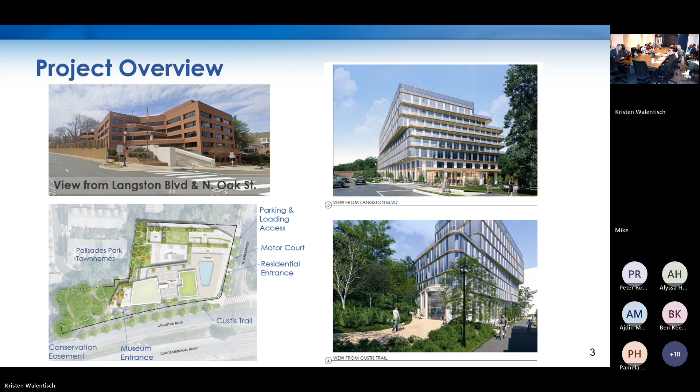As a refresher for this project, in the upper left-hand corner we have a view from Langston Boulevard and North Oak Street of the existing office building that was built in the 1980s. In the lower left-hand image, you can see a site design of the proposed building with some points to call out. In the upper right-hand image, a rendering of the proposed building from Langston Boulevard and North Oak. In the lower right-hand image, a rendering of the museum proposed on the ground floor from the southwest corner of the building. Okay, turning it over to Daniel.

Thanks, Kristen. I'm Daniel Creed with the Department of Environmental Services. I'm covering the transportation aspects of this application. The site is located at the corner of Langston Boulevard and North Oak Street, and the property is served by multimodal transportation options, including a nearby ART bus stop located just east of the site along Langston Boulevard. Additionally, the Rosslyn Metro Rail Station and associated bus bays are approximately a third of a mile southeast of the site. The site is subject to the transportation policy found in the Master Transportation Plan, or MTP, and the Langston Boulevard Area Plan.

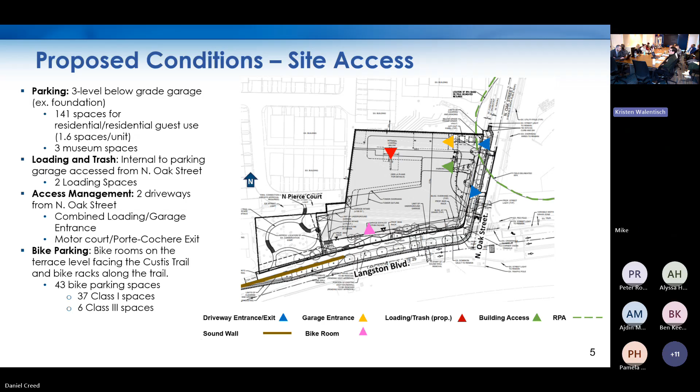The existing sound walls serve Interstate 66. Any modifications to the sound wall will require approval from the Federal Highway Administration.

The applicant is proposing a 43-foot wide streetscape consisting of a 13-foot landscape buffer, a widened 12-foot wide Custis Trail, and an 18-foot wide building zone and landscape buffer.

The Langston Boulevard area plan does not provide specific streetscape sections, but does provide recommendations on how a proposed residential building should interface with the Custis Trail. If the sound wall is removed, the plan recommends street trees between the road and the trail, a 20-foot landscape buffer between the trail and the building, and an overall building setback from Langston Boulevard of 45 feet.

The Langston Boulevard area plan also designates the intersection of Langston Boulevard and North Oak Street as a potential location for future intersection study. The plan identifies several intersections where there are opportunities to achieve Vision Zero goals and improve intersection operations. The Custis Trail crosses North Oak Street at this intersection, and the plan recommends that the intersection study evaluate opportunities to create more comfortable pedestrian crossing and manage trail interactions. The applicant has submitted a study.

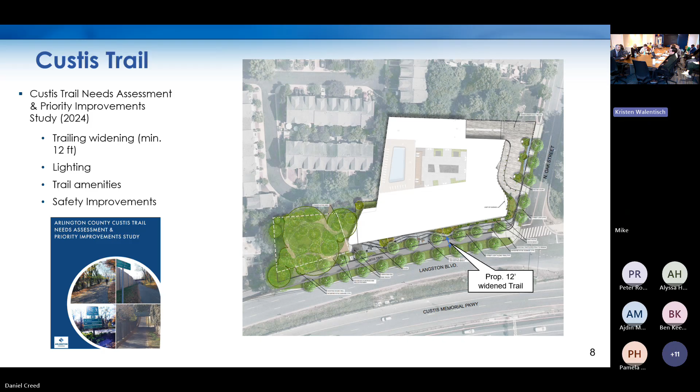To protect water quality in sensitive areas along Arlington streams, certain areas have been designated as resource protection areas. A resource protection area is an area designated by the Chesapeake Bay Preservation Ordinance that typically includes a 100-foot buffer around protected wetlands, streams, and tidal shores.

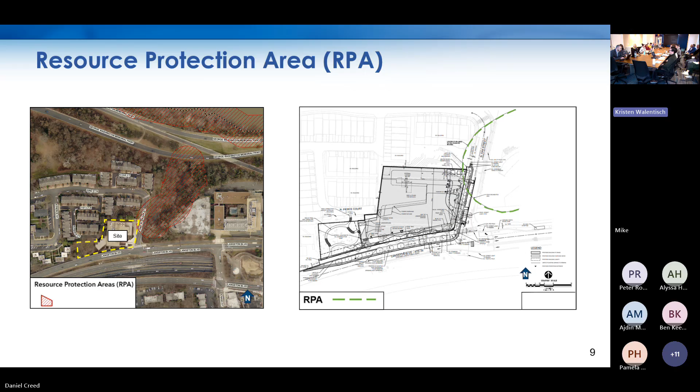As currently designed, a small portion of the proposed building in the northeast corner is within the RPA and will require an RPA exception. RPA exceptions are reviewed by the Chesapeake Bay Ordinance Review Committee, or CBORC, and require a public hearing. The project must be approved by the CBORC, or any required mitigation included, prior to the county board hearing.

Turning to open space and landscaping, there is the conservation easement located on the southwest portion of the site. The easement is held by the Northern Virginia Conservation Trust. There is not much area plan guidance for treatment of the conservation easement. The area plan just notes its existence and states that the existing easement trees within it should be conserved, which is what is proposed. So it will remain largely untouched except for removal of invasive species and the inclusion of a new pathway. I believe the applicant has a revised design, which we'll see tonight on their slides.

As far as area plan conformance for open space and landscaping, the tree canopy coverage guidance recommends a coverage percentage of 35%, which the applicant far exceeds with 53%. For the private open space recommendation, the area plan guidance is 15%, and the applicant is proposing 49.7%. That comes in the form of terraces and rooftops and everything, which is why we're getting such a high percentage.

For sustainability, the overarching goal in the area plan is to transform Langston Boulevard into a green corridor with street trees, increased landscaping, reduced impervious surfaces, overland relief, and environmentally sustainable, energy efficient buildings. This project, as proposed, is largely in accordance with that. As a reminder, they are not participating in the green building incentive policy and therefore do not need additional density through green building measures. However, the applicant is still proposing LEED Gold Green Building certification, all electric Energy Star appliances, at least 20% energy cost savings, water and air quality efficiency measures, and reuse of the existing garage foundation. The applicant will go into more detail on these measures in their slides.

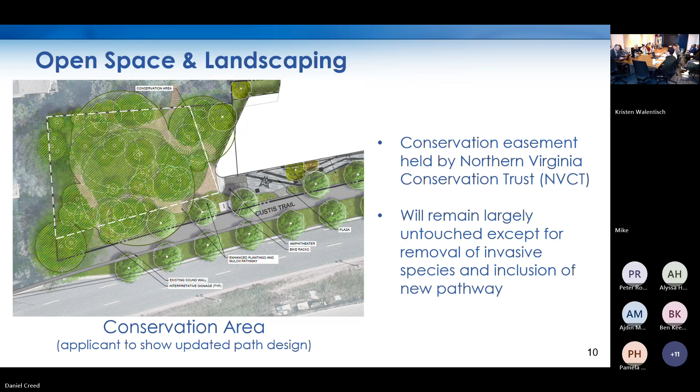So we are going to talk about transportation first, then open space. We'll talk briefly about building sustainability and then close with community benefits. Mike Pinkoski with Bika is going to take the lead on that. I did want to recognize Abby Beal, who is with Sustainable Building Partners, our building sustainability consultant. Stephanie Pankenwitz has also joined, who's working with Taylor from Land Design on the open space.

Before I recognize Mike, this has been trying to thread a needle, with an emphasis on the lived experiences people know are happening with the trail and North Oak Street, pedestrian safety, and bicycle safety. We also heard during the online engagement that the width of the trail is a concern. Just because it says a minimum 12 feet doesn't mean it has to be 12 feet, it can be more. So we've spent the last couple of weeks, since our first SPRC, working on that.

As Taylor and Stephanie will talk about, we've really focused on renewing thoughts about biophilic design, opening up the site for that conservation area. We're also trying to thread a needle between a connection point to the north on the PPOA property, and how that could be memorialized in the future, while also running into the reality of what needs to be reflected at this juncture with the zoning.

So on all these things, we are excited about the progress we've put together. At the end of the presentation, if there's time, with the indulgence of the chairs, we do have some updated architectural drawings. We have a material board as well that we can show. So I'm going to stop talking here.

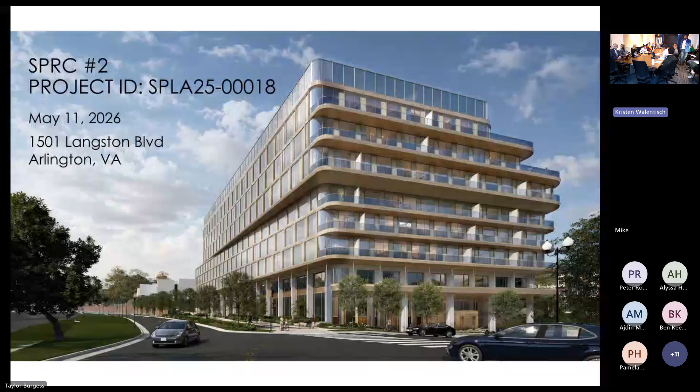I'm going to turn it over to Mike, who will lead us through the first part of our discussion, which is transportation. Hi everyone, again Mike Pinkoski with VIKA. Go to the next slide. Just to orient ourselves, we're at the intersection of North Oak and Langston Boulevard.

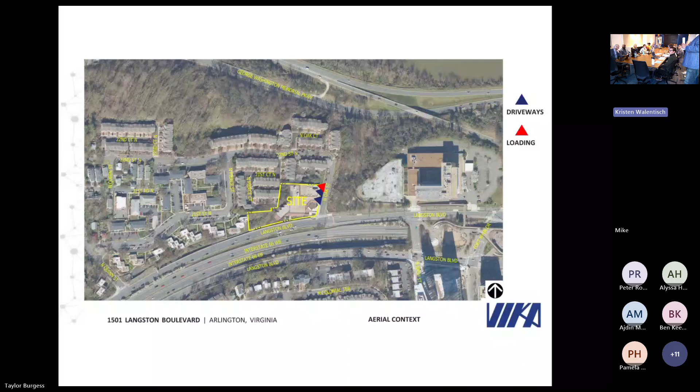On the next slide, you'll see we are consolidating access at the red area, positioning our driveway as far away from the Langston Boulevard intersection as possible. That curb cut is being reduced from just over 40 feet to 24 or 25 feet.

As Daniel mentioned, we are proposing to retain a porte cochere with 2 queuing spots. That's going to be one-way counterclockwise, and that curb cut will be 12 feet. So we've reduced the driveway width essentially in half from what the existing condition is out there today.

Bullet 3 represents a new streetscape that will be put in. If you're familiar with the site, you have these driveways and then a small segment of brick sidewalk, with no street trees today, so there's no buffer between the pedestrian and the road. That will change with this proposal.

4, 5, and 6 represent the removal of a portion of the sound wall. Today the sound wall comes all the way up to the intersection, creates a tunnel, and limits visibility down the trail for both users of the trail and drivers on Oak Street.

5 represents the widening of the trail. Daniel mentioned 12 feet; we are studying and proposing 12 feet behind the wall, and after you pass the wall, widening it to 16 feet. Then at the intersection, it'll narrow back down to 12 feet just at the crossing.

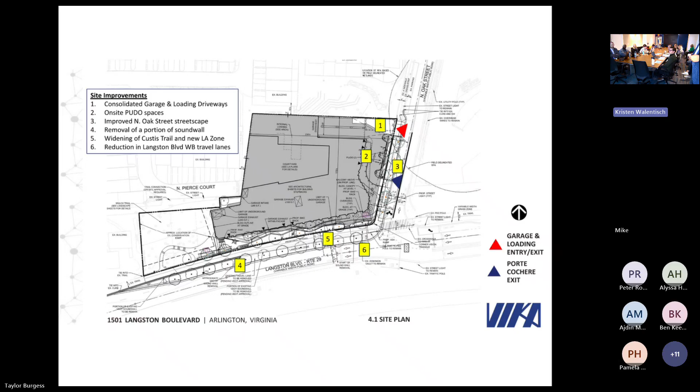6 represents the closure of 1 westbound lane. There is a curb extension there today which effectively reduces the capacity for throughput at the intersection. Essentially what we're doing is proposing to extend the length of our frontage and remove that travel lane.

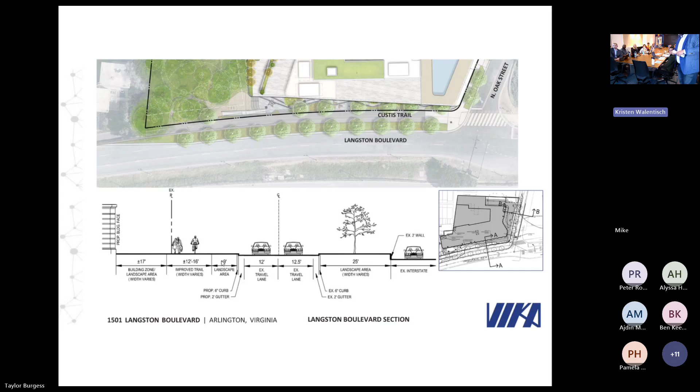Here's both a plan view of the rendering on top and a section view below. A little bit of an update from what Daniel had shown is the way we're breaking up the space from the curb to the building: 12 to 16 feet for the Custis Trail, reducing the building zone slightly and the landscape amenity panel slightly, while still meeting the VDOT minimums for the landscape area, and again 2 travel lanes westbound.

On North Oak Street, we are effectively narrowing this segment from where the parking starts at the northernmost point. We're bringing the curb out and extending that to where the existing curb is today at the intersection, which allows us to get in the landscape panel with the trees and a wider sidewalk. Very important for the project.

One other thing on that slide: today, the way the loading dock is oriented, a truck has to pull down North Oak Street and then back into the loading dock. With this design, the truck will pull straight into the garage and complete that turning maneuver within the garage.

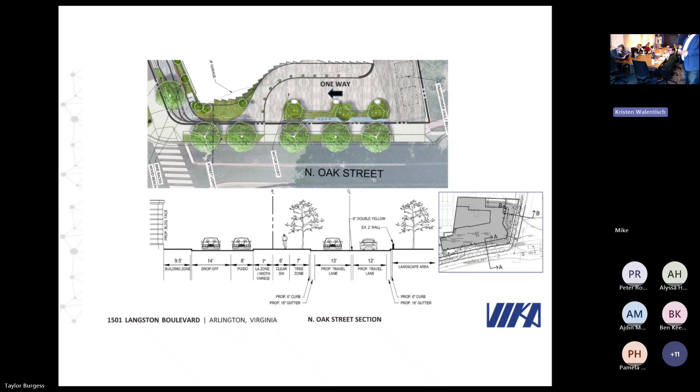We did a couple of different studies as part of this. We did a safety assessment of the Quinn Street and North Oak Street intersections, looking at crash data provided by VDOT. We did an operational analysis for VDOT as part of the justification for removal of a portion of that lane. And then we did a multimodal overview summarizing all of the multimodal transportation elements available to future tenants.

So what we have here is the multimodal trip generation—the expected hourly auto trips as well as person trips. And on the right, we have pedestrian traffic and some of the bicycle traffic that was observed during the peak hours.

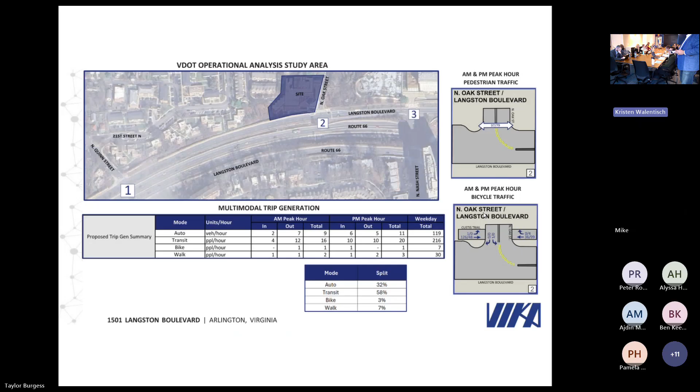Daniel covered this pretty thoroughly. We do have a 1.6 parking ratio for the multifamily. It is a for-sale product, and that 1.6 includes visitor parking as well as staff parking for the building, plus a couple of museum spaces.

Day one, 4.9% EV spaces, which equates to 7 spaces, with an additional 16% EV-ready for another 23 — a total of 30 spaces that would be either EV on day one or EV-ready. We also have 8 accessible spaces and 9% compact.

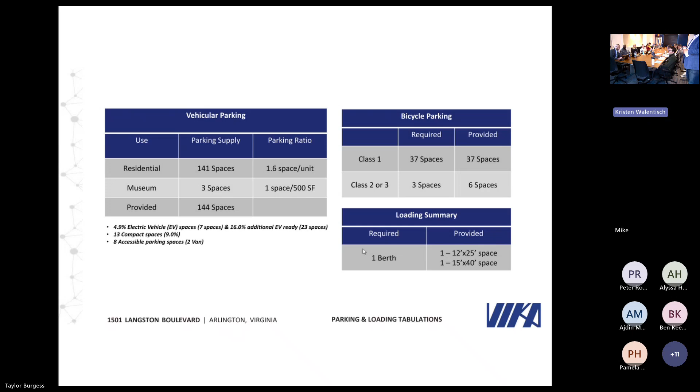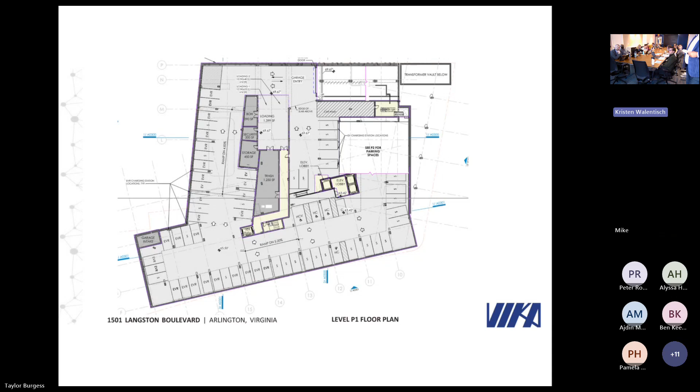Next slide. The purpose of this slide is to show where the bike room is in relation to the trail. The main bike room in the building exits straight out from this door onto the trail. And in front of the museum, as well as at the corner, we have short-term bike parking.

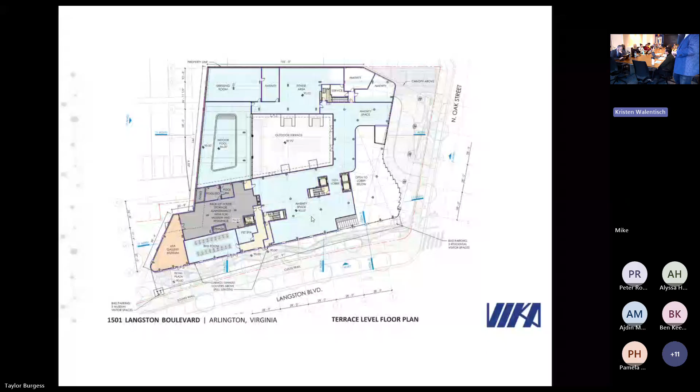I just want to level set — by my timing, you're halfway done, but not halfway through your slides. Almost done, okay, one left. No, I was going by the number of slides I understood. Continue, I usually talk fast. Sorry. It's okay, no, it's very easy to understand you, just wanted to level set.

Auto movements again — this is just what I explained. Trash and the loading: the max size truck the building can accommodate is a single unit 30-foot truck. Then in the upper right, we did an auto turn for an Escalade to get into one of those Pudo spaces.

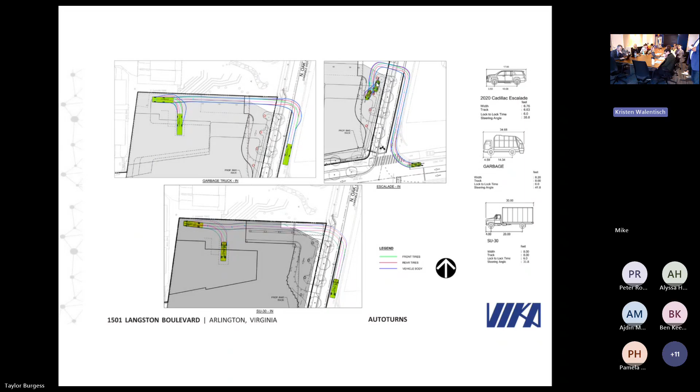Next slide — this again relates to what Chrissy had mentioned earlier. These are standard site plan conditions for the TDM plan, so we expect to commit to a TDM plan as part of this application. That's it for transportation. Taylor, take it away.

So he had one more slide. Yeah, it didn't count. No, sorry. I see how you work. Okay, there you go. Jeff, did you want to talk to these real quick, or you want to?

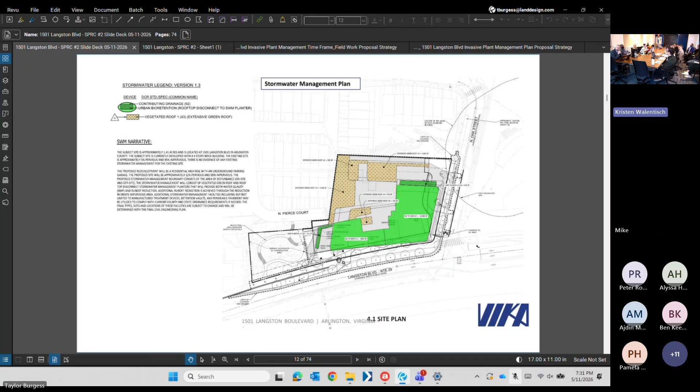We can do a minimal stormwater treatment. The short answer is there's no stormwater management on site today. We're proposing to meet state and county regulations through a combination. You've all heard this routine before, right?

There's a combination of vegetated green roof and stormwater planters, wherein we take the rainwater that falls on the roof and direct it through the rain leaders to the planters. Those two things help to meet the state standard for runoff reduction, allowing some absorption and transpiration. Lastly, we are reducing the amount of impervious surface on the site a little bit. All of those things together add up to a much better picture.

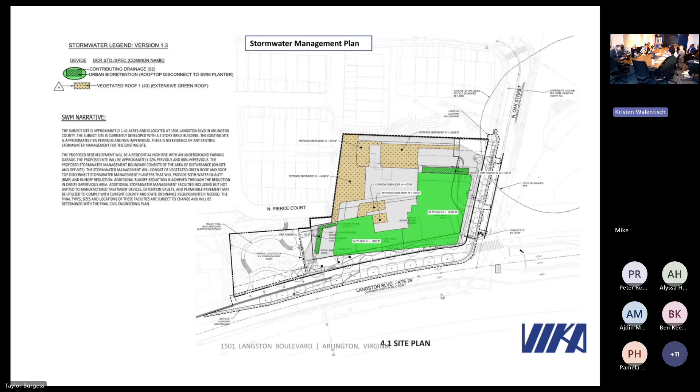Everything that lands on our site, within the building, will be controlled. That's basically what these slides say, that we are meeting both the state's and the county's guidelines and requirements for water quantity and water quality treatment.

There's one next slide that just summarizes this. This is the RPA. We did a water quality impact assessment, or analysis, and submitted that to the county. That was the mechanism by which they recognized that there was a little tiny piece, about 11 square feet of the building, up in the air, but nevertheless it was into the RPA.

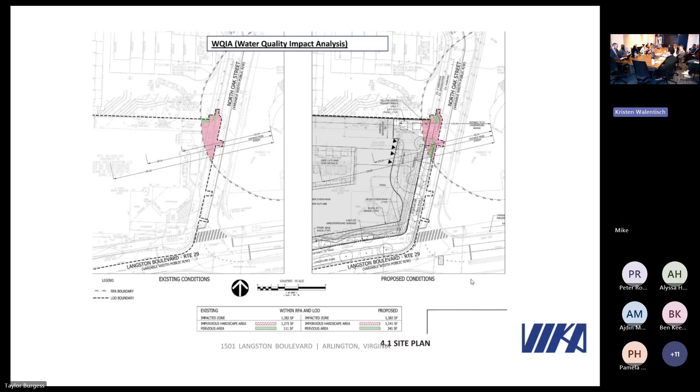Happy to report that, and our architect will talk a little more about this later, but the big reveal is that the building's been pulled back. There's no need for an RPA exception request, so that'll shorten all of the hoops we have to jump through. Anyway, that's it for stormwater stuff.

For open space and landscape, one of the unique things about this project is that nature isn't off to the side. What we tried to do is integrate and weave it throughout the project, bring this green space down in front of the Custis Trail, and really green up a lot of these terraces. You can see that in this site plan—it's not just green in one little corner, it's throughout the project.

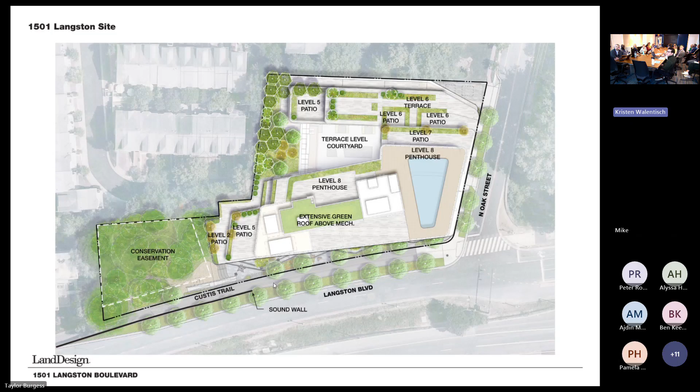We did that by looking at these tenets of biophilia: interaction with the natural environment, creating more spaces for it; and looking at natural forms and shapes that occur in nature, taking curvilinear organic forms and introducing and playing off those in the project.

One unique thing about light in this project is it isn't just about tons of light—we're taking moments of lots of light and compression, then opening back up again. You can see that through the space on this plaza, which will have more light, and then the compression of the conservation zone, which has a dense canopy. That light leads into the sensory experience of touch—we have lots of different materials, wood, natural stone, things you want to touch and feel. The sounds and smells are accentuated with different plantings.

The human relationship aspect is about bringing people into this site and into the nature. Right now the conservation zone is just kind of there off to the side; we're trying to celebrate it more and have people experience that space in the future. The organic processes aspect is that as people experience these things, they'll start to see natural processes—the seasons changing, the pollinator gardens as new species flourish.

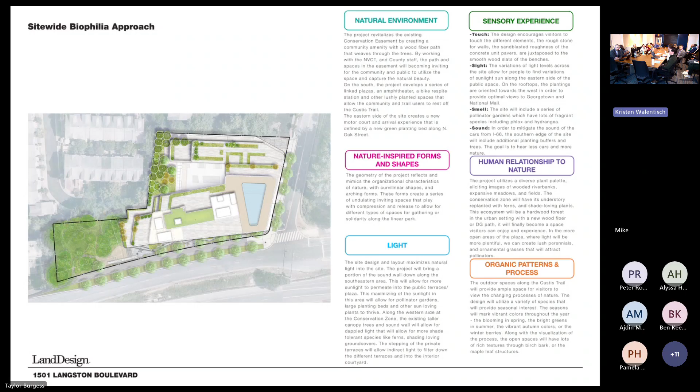So really, with biophilia, you get four distinct landscapes in this project. You get what we call the plaza and the trail, the more urban aspect, with plazas, terraces, hardscape, seating—elements that coalesce around the trail in North Oak. Then you have the conservation easement as it exists today.

With that, we're just looking to remove invasives and replant natives. The third landscape is this buffer landscape, which will be highly dense evergreen plantings, some more ornamentals, to screen our property from the adjacent properties—not just by sight, but also by sound.

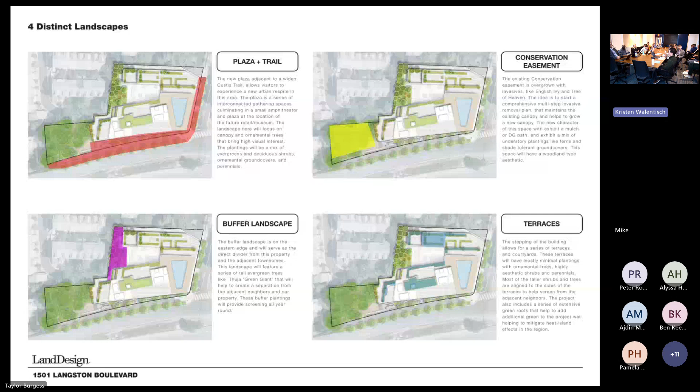The last one is these different terraces. The architecture is really unique, kind of flipping back and opening up to these different terraces. What we're doing with the architects is adding lots of extensive green roofs, but also larger planters where we're putting taller trees on the north and west to add additional buffer toward the neighbors.

As people have already mentioned, the big move here is the expansion of the Custis Trail. We're doing that twofold. One, we're expanding to 12 feet everywhere. But once we get past the Custis Trail, we're proposing to go to an additional 16 total feet, over about 60 feet of distance, then back down to 12. That will align us with what's happening on the Marriott side, which is also 16 feet. We think that's a great addition.

The other real addition is that we're adding another 16 feet to the Custis Trail, because this entire plaza terrace landscape is a series of plazas and ramps that get someone from down here at one very low grade all the way up to the conservation zone. We've added a new ramp to bring ADA access, which right now cannot get up to this space because the trail unfortunately is not ADA accessible. They'll be able to traverse this landscape and get all the way to the conservation zone.

So really, you're looking at this whole thing as being a new Custis Trail. By adding this, we're hoping that more pedestrians will use that as opposed to being on the trail in this portion. Now I'll run you quickly through some renderings that show this.

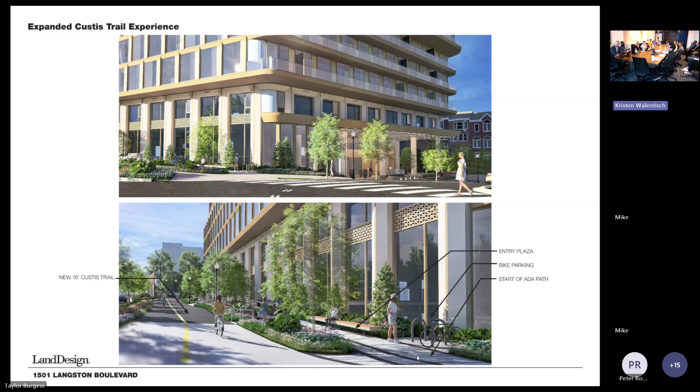Right here at the corner, you can see we're greening things up as opposed to having a giant sound wall and giant concrete steps. The entry to the plaza has lots of lush landscape, a nice seating area, and an interesting paving pattern that weaves you into it.

Halfway up, you'll see the bike respite station, which is going to have bike fix-its and seating. We'll probably put in a water fountain and things like that, really geared towards trail users coming off the trail.

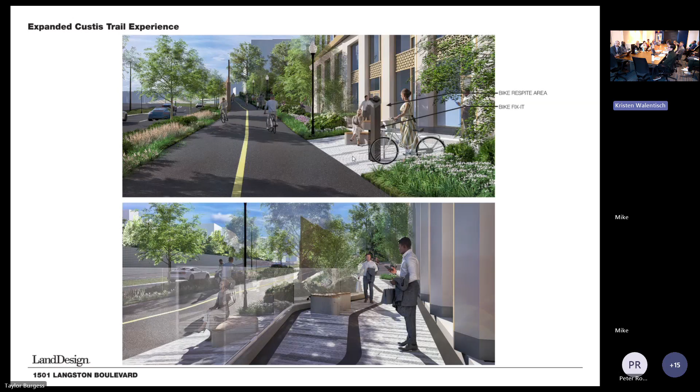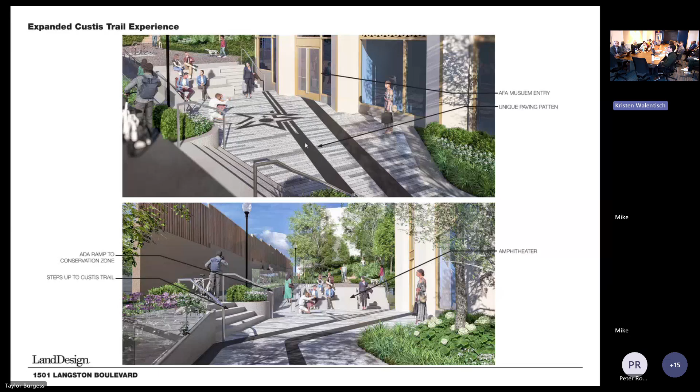At the top of the terraces, we have what we're calling the AFA Plaza, which is going to be a nice informal gathering space for either the AFA Museum or potential other events where you can have a small gathering of people. We have built-in amphitheater steps and terraces that get you up to the conservation zone, and a wider swath here for different activities to happen. We're also doing an interesting paving pattern that plays off the AFA logo. This here is just looking at that porte-cochère we've been talking about.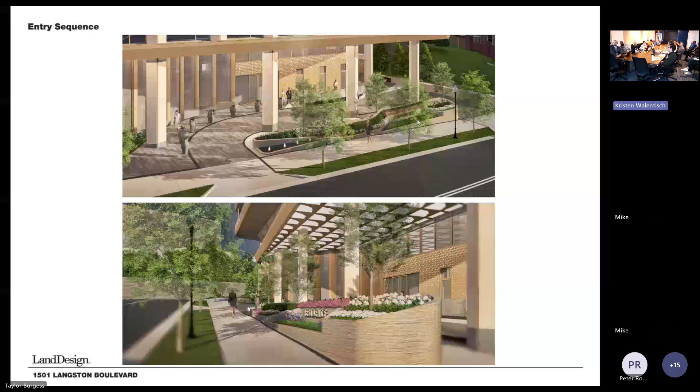Again, we're trying to bring green around. This plays off the same organic forms of the building and the landscape, to bring in some green right in front of that porte-cochere and kind of shield it from the outside.

Now, since we're running short of time, quickly on the conservation easement: we have a full conservation invasive plant management plan, about a 3-year process. These are just some of the highlights. We're going to go in there and try to get the woody shrubs first in year 1. It's also really important to get that English ivy, which is all over the place. Those are the most prominent issues.

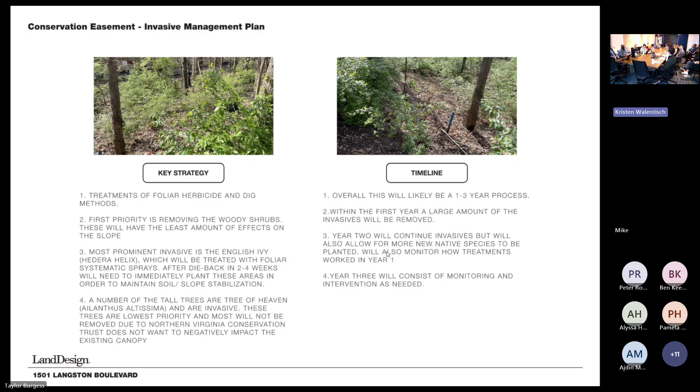By year 3, we're looking at mostly being in a monitoring and intervention stage, meaning we're hoping most of that work has succeeded, and we're just monitoring for new growth of any invasives so we can come back in and continue to remove them. We're hoping that really starts to turn this conservation easement into an experience and a place for people to go.

We've had discussions with the county and the Northern Virginia Conservation Trust, and we've coalesced on a much more scaled-back version of this path through the conservation easement. Right now, we're basically thinking it's just going to connect to the end of our plaza and weave you through this lower section. What that really allows us is to not go in there and tear up a lot. We're not going to have any erosion issues when we're doing this.

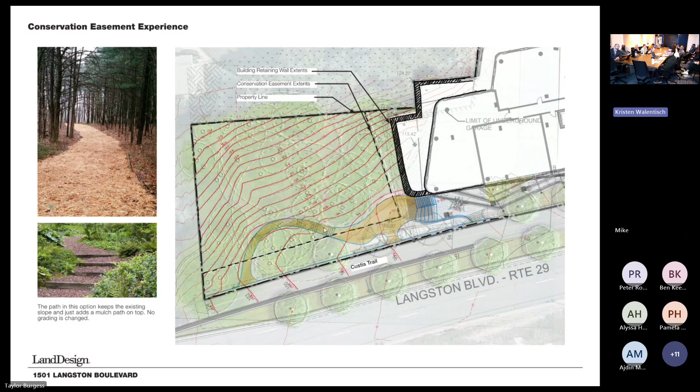We're looking at very minimal impacts with just timber steps and either a mulch or a DG ground cover for that. And then just to finish, it's got some renderings.

Are you the last speaker? You can be the last speaker, and then I want to hear the architectural updates, and I want to see the materials. Okay.

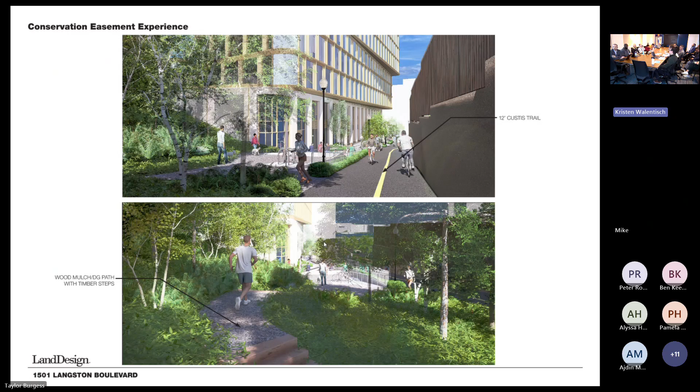Thank you. So then, yeah, this is just looking at that space. You can see it's kind of just a singular path now through the lower portion of the conservation easement. So we can skip over the building sustainability gap, that's not important.

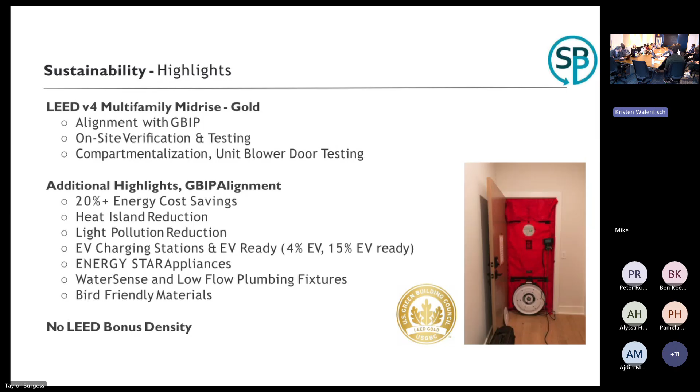Sorry, would you rather—I'm trying to be cognizant of your time to discuss as well. I've read all the sustainability stuff, so Loretta says I have a lot of comments, so we think it's good. Are you okay with that? Okay, all right, thank you.

So I'm turning it over to JP right now to talk through the architectural updates. Good evening, everyone, and thank you for all your feedback from the last meeting. We understood from the previous renderings the materials were a little hard to read, so we went back and really made our best efforts to represent them correctly.

So this is a view from Langston and North Oak. Starting from the base, just like before, we're proposing stone material. You can see these strong vertical pillars along the first two stories of the building. That's all going to be clad in stone, which is right, that sample right there. And then they will have a complementary granite base.

This stone material is a warm, natural material that I think will complement the neighboring properties really well. Also, on these two stories, we are also proposing the bird-friendly glass. Sorry, which stories?

These two stories here. So everything where the stone cladding is happening is also going to have the bird-friendly glazing incorporated. Similar to before, the middle and top we are cladding with metal panels, in two very warm colors, which are also on the table for us to pass around and take a look at. Next slide, please.

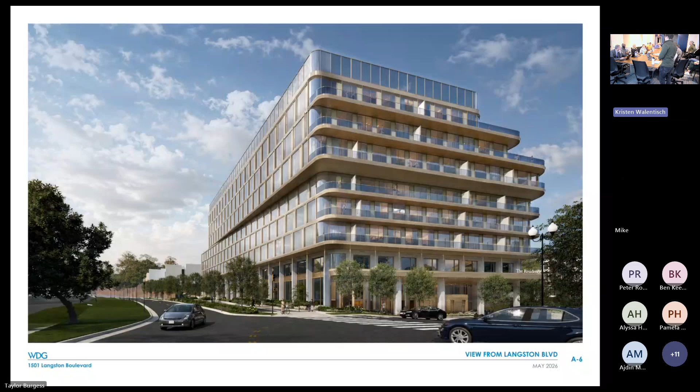This is a view from North Oak, looking south from the neighborhood. We've got a couple of recommendations to incorporate masonry into the building. To the left we have the porte-cochere, the covered area. To the right we have somewhat of a retaining wall, very similar to what exists today—it is a brick wall. We thought it would be nice to incorporate this brick material along the other part of the property.

As we're transitioning, that pedestrian experience coming from the neighborhood towards Langston Boulevard, it begins to break down the scale and have that nice texture and feel as we're walking down North Oak Street. Then at the top, as the stepping occurs, it will be glass and the two-tone metal panel colors.

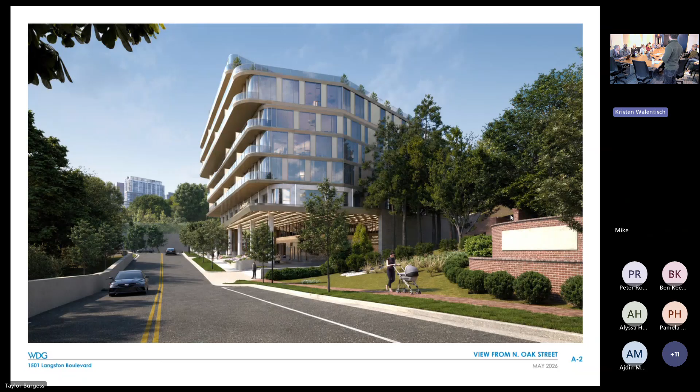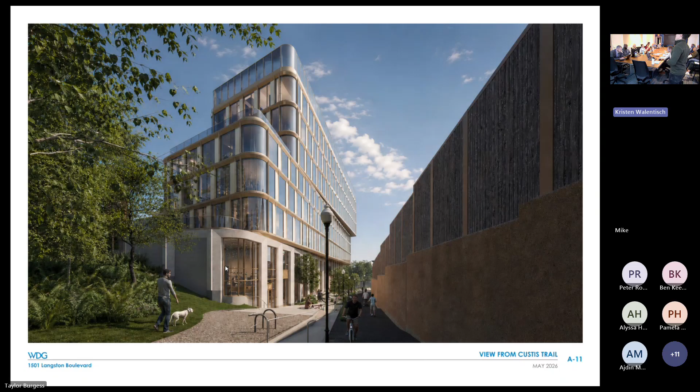Next slide, please. How many more slides do you have? Just two more. Okay. So there's a view looking east along the Custis Trail, where we're putting in the building. Again, this gives you a better, more close-up view of those stone materials that we are proposing along the base of the building.

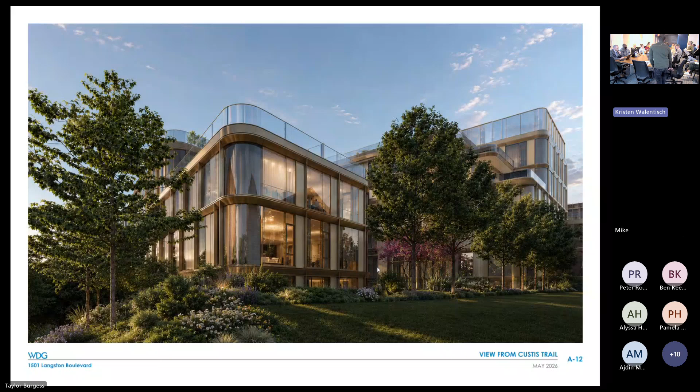All right, you're done, thank you. That was not a question, but I do really appreciate that you brought materials. I think that's super helpful. I like it when applicants do show and tell—this is one of my favorite parts. Be careful though, it's kind of sharp. Oh, okay, please don't have any injuries. I'm not writing up that report.

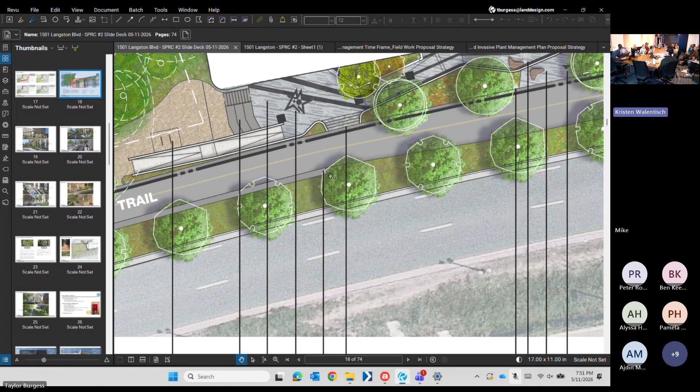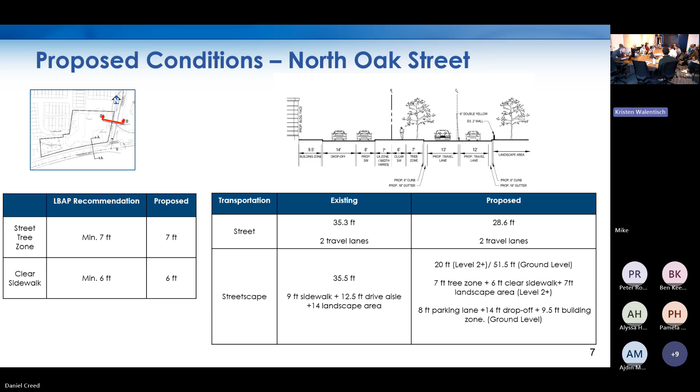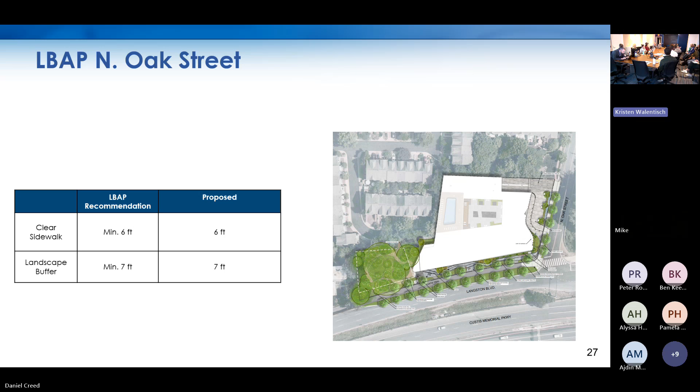Can I ask a clarifying question because of the approvals needed from bodies that are not affiliated with the county? Have you received VDOT and Federal Highway Administration feedback? What's the status of their assessment? We've made 2 submissions of the sound study and we're getting ready to make a 3rd submission in coordination with the county. They have asked that the county provide a letter of support. And as far as the road narrowing, we've made 2 submissions of the traffic study for that and are waiting to hear feedback on the next step.

Okay, thank you. I'm going to go to internet land, Ms. Van Hine. Hi Pam. Oh thank you so much. Hi, and I can't really turn my camera on, my computer will crash.

I have several clarifying questions about the motor court, please, if that's okay, because I'm trying to understand exactly how drivers interact with pedestrians and drivers interact with each other. So there's one driveway in - it doesn't make any difference if you're a truck or going into the underground parking or going to Pudo, they all use the same driveway, right? Okay. And I think one of the slides said that the exit for Pudo is only for Pudo, but you're saying that it could be for drivers coming out of the parking lot or underground parking as well. I assume the trucks aren't going to do that - they might not even fit under there. That could be possibly problematic.

So, both driveways cross the sidewalk next to Oak, right? And are you considering how you can improve the safe way for pedestrians who are using that sidewalk, whether there'll be signage? I think I saw coming - Pam, that's not a clarifying question. That's going to be handled when we talk through the full transportation topic.

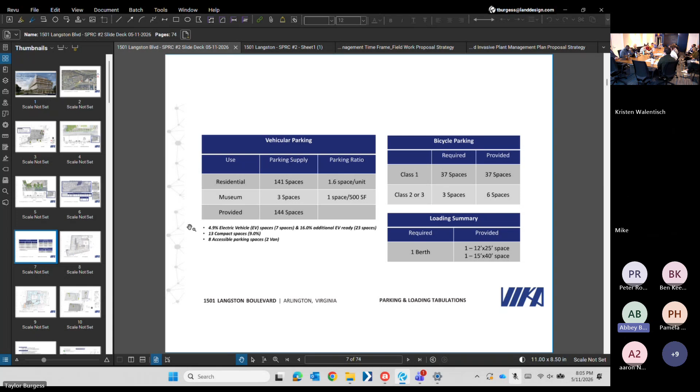But we are meeting all of the GBIP baseline requirements, and the bird friendly glass and the exterior light pollution reduction efforts that the team is doing are in alignment with GBIP. Electric is being used where it can, and there's been a lengthy discussion and consideration of how we can maximize that while still being a little bit limited by the utility. The baseline is ASHRAE 90.1 2010 Appendix G, which is mandatory for LEED V4 multifamily mid-rise when you do the performance path. I know that was asked. We're also going to maximize the heat island reduction options by using TPO where we can.

The EV charging stations, I'll let the applicant speak to a little bit more. I know that there may be some limitations with the actual electric capacity that can be provided. All of the appliances are going to be Energy Star. All of the applicable water fixtures will be WaterSense. There's no WaterSense label for shower or kitchen faucets, for example. And I think that might have covered everything, but please let me know if I can speak to anything else valuable.

Okay. I see hands. Okay, sorry, Commissioner Peterson, and then Commissioner Stein.

Yeah, I just wanted to go back to the gas cooktops that you're offering. So in the presentation, it mentions all electric Energy Star appliances. I think the woman who just spoke said that all appliances that can be electric are electric. But if you're having gas cooktops versus... sorry, all induction, Energy Star. They can all be Energy Star, not electric. Okay, if there's a way you can do induction stovetops, ovens, I think that's first of all very trendy.

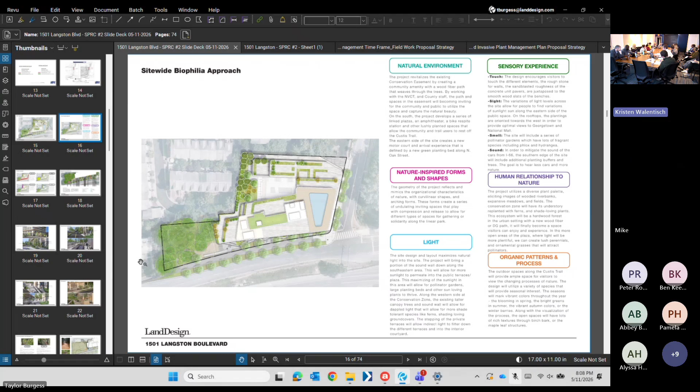Yes. So can I assume that the questions that were raised by our C2E2 rep this evening will be responded to, maybe by you on the side, in enough time for them to do their reports and get to commissions? Yes, Commissioner Bagley, we can do a separate sidebar conversation and respond in writing, whatever's easiest. Thank you, Commissioner Peterson, and thank you, Commissioner Bagley, for raising that. We want to make sure that's highlighted.

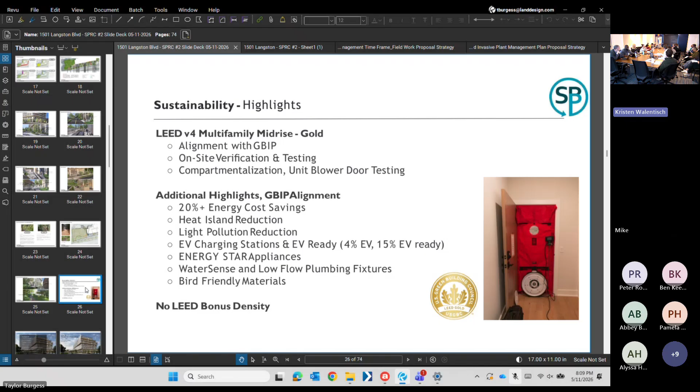Thank you. So it looks like you've got a lot of nice green roof or green terraces, or just biophilia on the roof and the different levels. But you don't have any pictures of it, you just kind of have the mock-ups where you show what it would actually look like.

There's no views from the northwest and northeast corner looking down at the terraces. So when you come to Planning Commission, could you provide pictures of that? Because I'm sure they're going to look great.

Certainly happy to. I do want to say I was really appreciative of the additional angles that you showed tonight for the remainder of the building, and I think it helped flesh out the building. I want to echo that thanks, and also thanks for bringing in the materials to show the exterior.

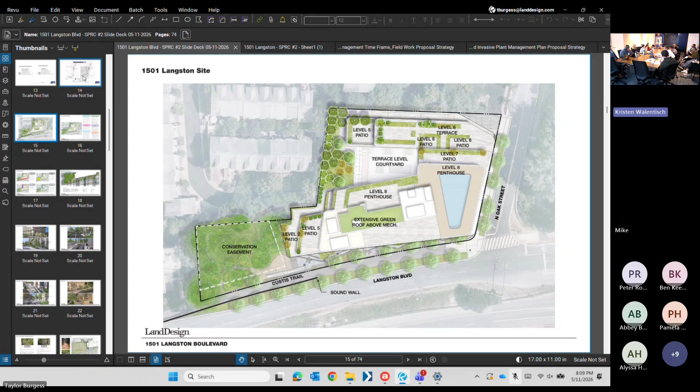Can I ask about environmental impacts? Yes, this is the time. So can we go back to the stormwater? Yeah, that one right there, the one after. Okay, so the building is going to be pulled back from that area in the corner.

So if you go up a little bit on North Oak, it's a stormwater retention pond for Palisades Park. It's one of the three that we're responsible for taking care of for the county. That's the only one on our property. That area where you see the words Oak Street, the beginning of the street, that's the lowest point.

And when we have major storms, the water that pools there reaches flood levels. So we are going to have to do a major project there, which I think we need to do in coordination with you so that we can manage that repair in a way that makes it more effective for both your property and the Palisades Park property. Because right now that low point is taking the brunt of all the stormwater rushing down from the top of that elevation all the way to the bottom of Oak Street, that corner.

So if we can, whoever's on the team, just have a conversation to talk through that, that would be helpful. Because everything that falls on our site is being gathered, if you will, and directed to the stormwater, so we wouldn't be contributing. You're not going to contribute to the other stormwater?

No. Where are you going to channel your water? Ours outfalls into Oak Street and then down and out. So everything is piped. What leaves the site is piped into Oak Street and then out, around and out. So it won't go toward you all.

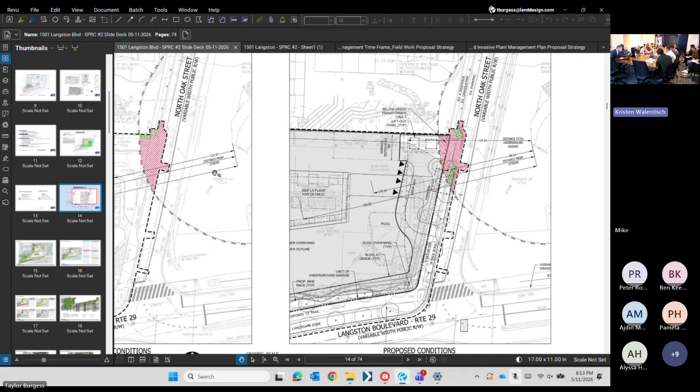Okay, I'm now going to take us back to the top of the agenda list. Just so we're clear, we've covered environmental impacts and sustainability, so we will not be re-hitting those items. We are now going back to transportation. Within transportation, we talk about parking and loading, streetscapes, Custis Trail improvements. I know some of the internet visitors and attendees had some questions about that.

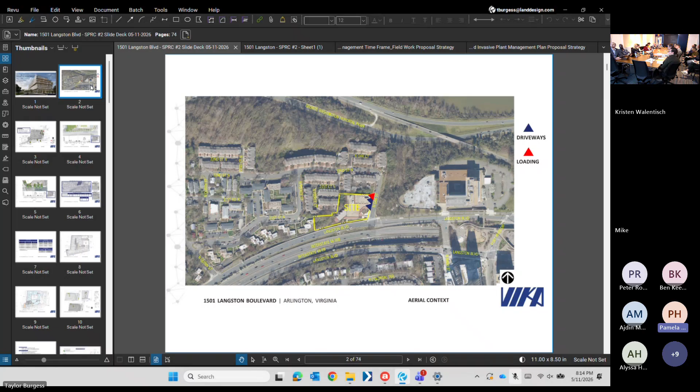Okay, I think the first one that I was stopped at was the driveways crossing the sidewalk on Oak, and what can we do to improve pedestrian safety crossing both of these sidewalks. Things like lighting, signage, different surfaces. I think I noticed in one of the slides for the motor court, there actually was a different road surface on the motor court than would be on the sidewalk and on the street. Is that true? I think one of the most important things is going to be making sure that the crossings are well lit and having signage to watch out.

And I did notice that you have this great sidewalk from the building entrance that's going to go over to Oak and around the corner, and that is not necessarily a feature of other motor courts, and that does mean that the tenants, or the residents, will have safe passage over to Oak and other places. I'm more concerned about the pedestrians actually using the sidewalk and crossing the driveways.

Let's see. One of my questions about the PUDO spaces is how will you enforce time limits? And I have a lot of concerns about driver-driver interactions. And if there's only one way in and you have three types of drivers going in, they all have to go in the same driveway.

People going to the underground parking will be crossing the path of the trucks, and people going into the PUDO area will be crossing both the parking entrance and the truck entrance, and they're going to have vehicles coming out at them. That is correct - that seems, I'm curious how you're going to manage that. It seems a little bit like you're going to have conflict between drivers and drivers. So I think those are my main questions about the motor court. And I have other transportation questions, but I'll stop right now.

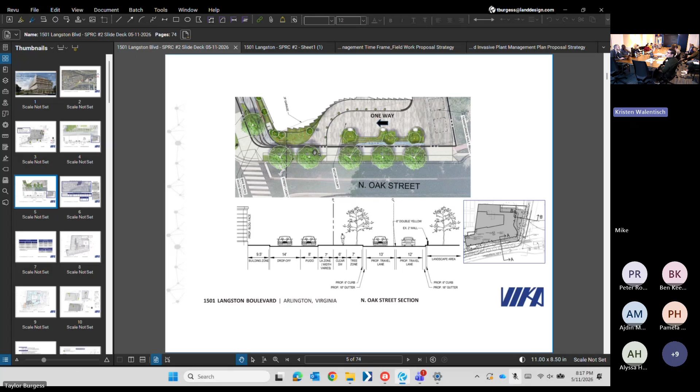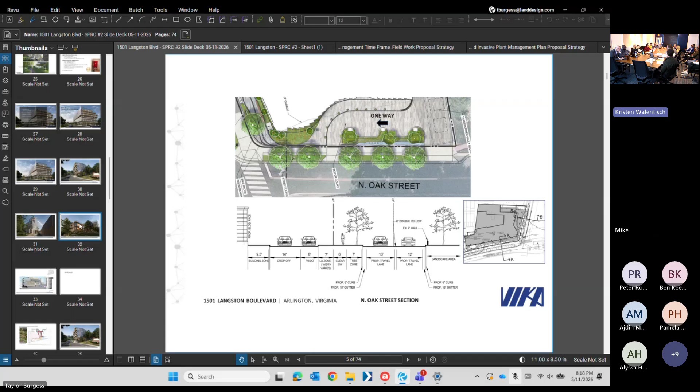But Mike - yeah, all great points. And everybody should remember that we're looking at this in plan view, but there'll be a roof over top of the porte cochere with additional lighting. So the porte cochere itself is going to be very well lit. I'll mention again, we're reducing the driveway width substantially. Today, it's essentially just a sea of pavement out there. So we are narrowing the driveway widths.

Today, loading vehicles back into the loading dock, which is dangerous for anybody on the sidewalk. Now they're going to be pulling head in, head out, which is the county's preferred option for that. I think that covered all our questions.

And the sidewalk question: the sidewalk could be a continuous flush treatment, with aprons at the entrance and exits. Yeah, and warning signs to watch out for pedestrians, and lighting. I appreciate the lighting under the overhang, but I don't think it quite reaches the sidewalk.

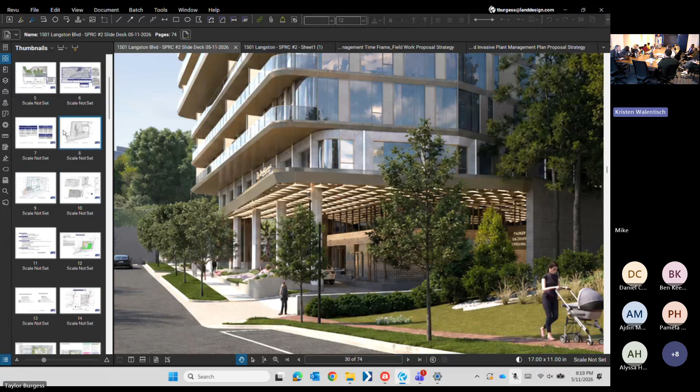Thank you. What I want to focus on is Langston and Oak Street. This has come up in an earlier SPRC for a different project, that this whole stretch of Langston from Rosslyn to I-66 is really a very poorly designed road for current conditions. I'm thrilled that you're looking to narrow it to 2 lanes. I think that's part of the Langston Boulevard area plan, ultimately to have that be 2 lanes in each direction all the way through the entire thing.

A study will be coming up. The Planning Commission is on record to try to accelerate that study. I want to make sure that anything we're doing here will not interfere, will not prevent further development of Langston in the direction we want it to go.

The Oak Street Langston intersection is very, very dangerous. It's one of the highlighted Vision Zero hotspots for the entire county. And it is part of the study. And of course, there's a VDOT study going on right now, which includes this particular intersection.

So there are so many wheels going on right now that I want to make sure we're never going to be working at cross purposes, that everything we do here is consistent with what comes out of, or what we want to have coming out of, both the VDOT study and the county study for the ultimate redesign of that entire long stretch of Langston Boulevard. I'll probably want to emphasize that at Planning Commission again, and at Transportation Commission, because both commissions are on record about this.

What Ms. Van Heim was saying about the safety for pedestrians and also the bikes, you're narrowing Oak Street. I'm strongly supportive of it. That'll just naturally slow traffic along Oak Street. But I'm still concerned about the actual intersection, and not even on your property—it's across the street on the Marriott side, where it still seems to be not quite the sharp curb that really should be. There's that turn lane there.

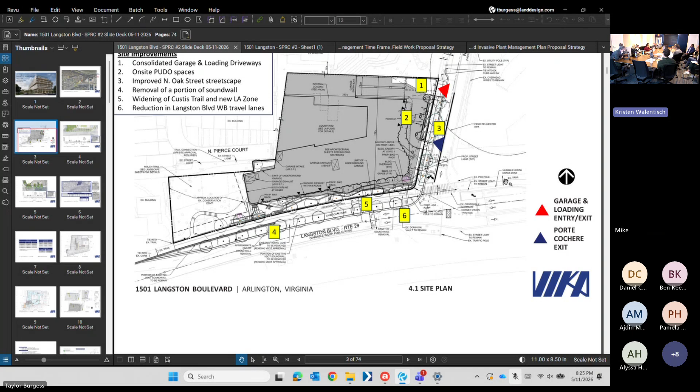That's why we're looking for the letter of support from the county. DES, are you going to be giving that letter in a timely fashion? The trail is owned by VDOT and maintained and operated by Parks and Recreation, so we've requested that Parks and Rec issue that letter. It's outlined in the Langston Boulevard area plan and the Custis Trail Needs Assessment, the desire to have the sound wall removed and the travel lane removed in this location. So we are supportive, and that letter is being drafted currently.

So we have a third entity now involved, Parks and Rec. But did you say Parks and Rec is going to approve it? There's a letter being drafted. So it is in process.

Good evening, all. It'll be a big help when we have that letter to submit as additional support with the study itself, and then it kind of checks that box from the state's perspective that the locality is behind the removal. I'm totally supportive of removing the wall and making the improvements there for bikers and pedestrians. This is like a real win all around for the county, so I'm glad to hear it's moving ahead.

Thank you. We do have Walter Gonzalez online with DPR. Good evening, Walter with the Parks Department. Jim, to answer your question, we are working on the letter. It's drafted and is currently being reviewed by our leadership to make sure we're all okay with what's on it. We're in coordination with DES on getting that letter to them, hopefully in the coming week or two. Okay, great, thank you. That's good to know.

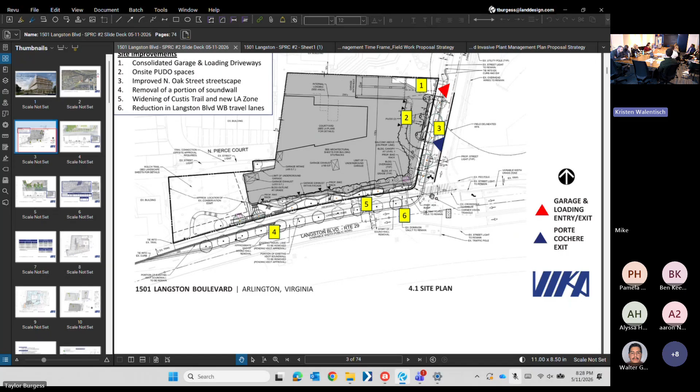We're considering using different pavement patterns rather than a rumble strip on the trail. So you have the asphalt trail, then maybe it goes to concrete first for a 3-foot section, just to give the user on a bike that vibration of the changing patterns. Those are a couple things we're still considering.

Jim took the words right out of my mouth. So I will just say the road diet - I'm a big fan of that. That's a big piece of reducing these traffic fatalities. And I will underscore the need for a study at this intersection, because it's a very janky thing that needs to be looked at. That's all I'm going to say there.

I will also associate myself with Commissioner Tommy's comments, and I'm glad we're already thinking about what would need to happen if we don't get the timely responses from VDOT and our state government that we would love to have.

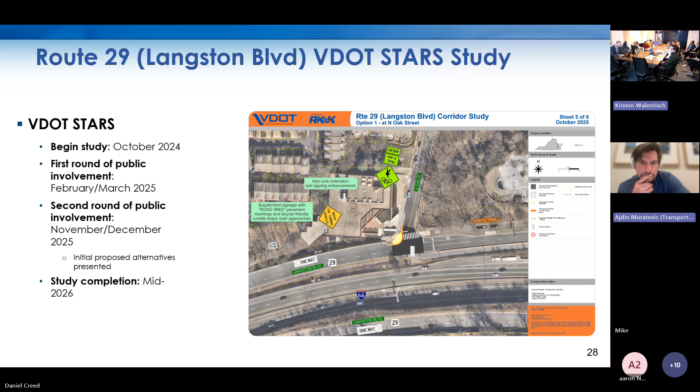And just for context, the lane at Langston Boulevard was reduced in 2020. This used to be 3 lanes from North Lynn to North Oak, and they removed the lane. There is no sound wall - the lane was removed and the trail was expanded to 16 feet. So what we've requested is that you continue that in front of the sound wall, giving you a nice consistent 16 feet, which should provide pretty good separation between trail users and a consistent experience all the way from North Lynn Street.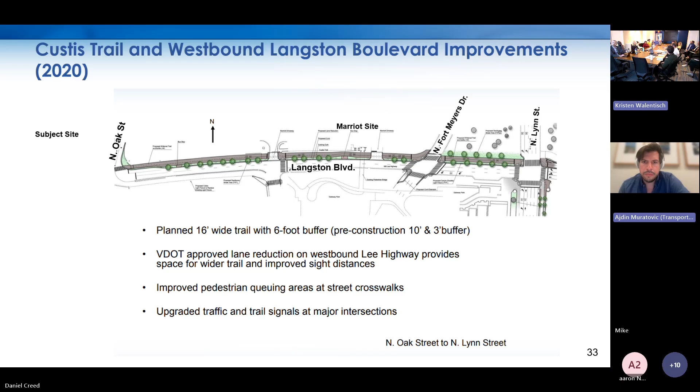And if I may pick up on that too - Taylor can speak to this as well - we also have that pedestrian zone adjacent to the building, which will provide an intuitive and safe separation between bicyclists and pedestrians who want to get off the trail for that period in front of the building. It looked like this before in 2015 with the extra lane configuration and some other improvements, and then what it is today with the expanded trail and removal of the lanes.

Is there a way to make the trail width 16 feet at the intersection instead of narrowing it back down to 12 feet? What was your decision-making process there? Because you have this going from 12 feet to 16 back to 12 in a pretty short distance. Well, I think the understanding is that...

The public right-of-way accessibility guidelines require that ramps on either side of the street are the same width. So even though the trail along Key Bridge is 16 feet, it narrows to 12 when you cross Oak. It needs to be 12 on the receiving side, which is our side of Oak Street, and then it can narrow, then widen back out again. The only way to get to 16 feet would be to redo both sides - completely redo the intersection - but the two need to be the same. That's why we're coming back down to 12. Okay, let me make a note of that.

And then for Langston Boulevard, the obvious response would be VDOT, but in terms of the county, what is stopping us from advocating for narrowing the lanes down to 11 feet? Because we've seen this section presents a highway-like condition, and any type of narrowing we could get here would be useful, especially in light of the tragic accident that happened further down the road.

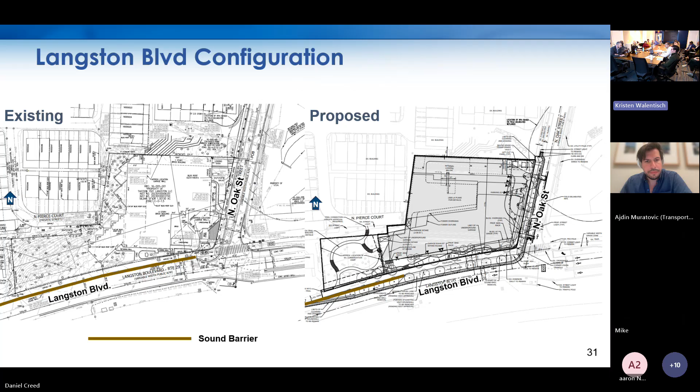I know that was a bus turning, but any narrowing would increase safety here. So I think that's more of a DES question than an applicant question. We'll definitely take a look at that, and I think DES is going to get back to you.

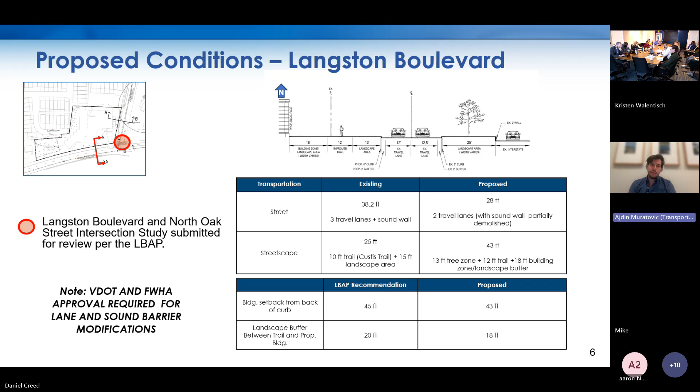Any other comments? Okay. Yeah. Well, I think Commissioner Lantelmi has touched upon this as well. When you're coming up Langston Boulevard, turning onto North Oak, the whole road design incentivizes speeding, and I'm worried that people will be turning too quickly onto North Oak across the Custis Trail. So have we studied the possibility of a smaller radius in that curb on the Marriott site side, not on the applicant side?

No, we haven't looked at that, but I will note that if you look at the evolution of this intersection, I know it's still not perfect per se, but there's been a lot of improvements with the project to add the trail, including the right turn lane, and there's a no turn on red, so it's an exclusive right turn arrow there, and signal improvements were done. If you look also on North Oak, that was reduced from two lanes to a combined one lane. So this intersection has evolved, and once we also get the sound wall out and increase that field of vision, this is an opportunity to create big improvements in safety, to continue what we've been doing since 2020.

I'll also add that the Marriott site is under active-ish redevelopment. It's currently subject to a special GLUP study, so there are plans to redevelop that site in the future, at which point a narrowing of Langston Boulevard further than what's there now, or what was envisioned during the last site plan approval which is now expired, will also be explored.

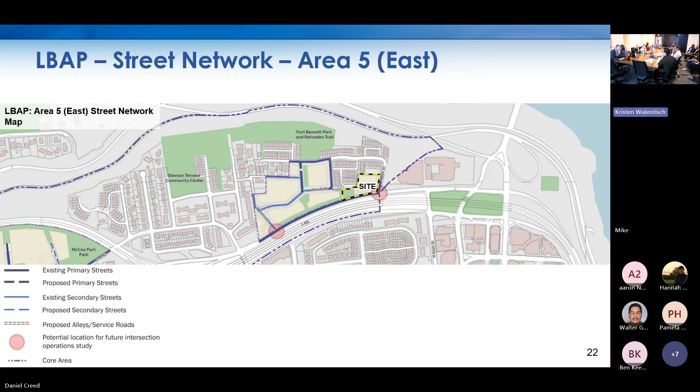I will say that since the changes have been made, and I drive that every day, I have noticed that drivers have been paying attention and following the rules. Pedestrians have been paying attention and following the rules.

The one community that has not been following the rules, from my personal experience, there were three cyclists that gave me a Cheshire grin as I had the right of way, and they were about to ram straight into me as I was making a left-hand turn. They looked at me with a smile like, oh, I almost got away with it. And it took everything in me not to stop the car, get out, and yell at them that they're putting multiple lives at risk with their completely irresponsible behavior.

This happens consistently across the Custis Trail. So if we're going to support the cyclists, they also have to show the same level of respect as we are giving to them, because they are not demonstrating respect back to pedestrians and drivers. The safety issues at that stop have to be addressed, whether we do rumble strips, change the color, whatever it is—they have to understand they have to stop when that light turns, and they're not doing that right now.

That's one. The other thing I wanted to clarify, as a number of people raised, including several commissioners, is the garage entrance and exit on Oak—there is a setback, right? What is the setback from the garage entrance to the actual road? Because it goes into the building. So what is the actual setback, so when the driver is coming out of the garage, how much space do they have to see how many pedestrians are walking in front of them?

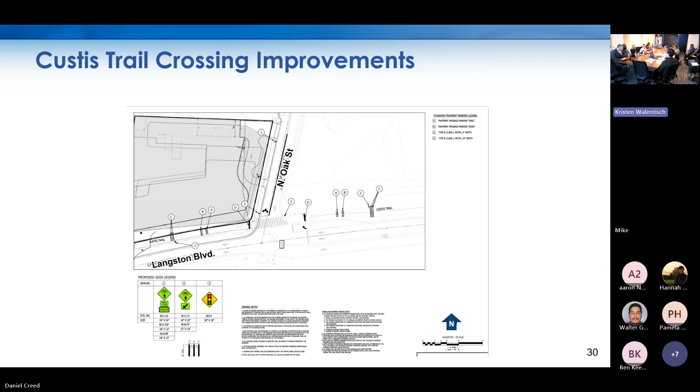Is that a question for DES? I presume yes. Yeah, there could be enforcement measures. When this intersection was improved in 2020, there was also updating of the lights, so there is a video system here. There isn't a need to press a beg button if you're a pedestrian or cyclist — there's an exclusive pedestrian/cyclist phase to that light. So every time you come through, there's a light exclusively for the trail users, as part of the regular cycle of lights.

Still not slowing the bikers down though. Can I just add one thing? I think there's one thing we need to consider, which is the topography, because on our site there's a 40-foot drop, and if you extend it, it's probably 60 or more. So there's a natural downhill acceleration we need to consider to see how we can slow it down. Yeah, I think rumble strips will help with that. I'm looking for other options, I'm not trying to ticket every cyclist.

I'm saying if we need to look at other external things in addition to rumble strips, I'd like to put the county on notice that that's something we're hearing is a problem. The problem may get worse because we want more people using the trail. We need to be prepared to take action for that, in my view.

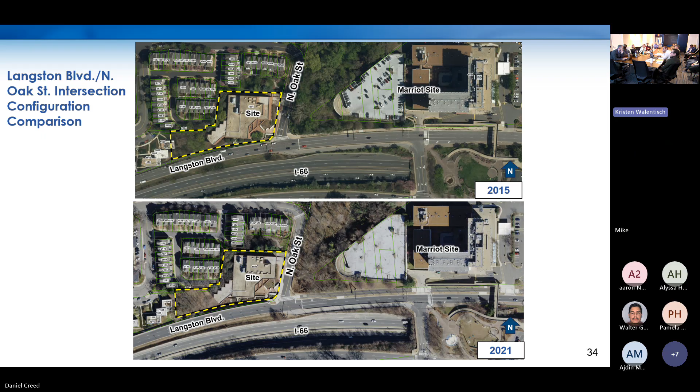Yes, just a quick general point. The discussion we're having right now highlights the general importance of separating modes, minimizing these conflicts, and how that should be a best practice. I know it's difficult right here, we have just a small road, North Oak, but pedestrians, cyclists, and cars should be mixing as little as possible, so fewer people get upset by cheshire grins or other inconveniences, which is mild relative to the serious safety issues others have experienced, including losing limbs.

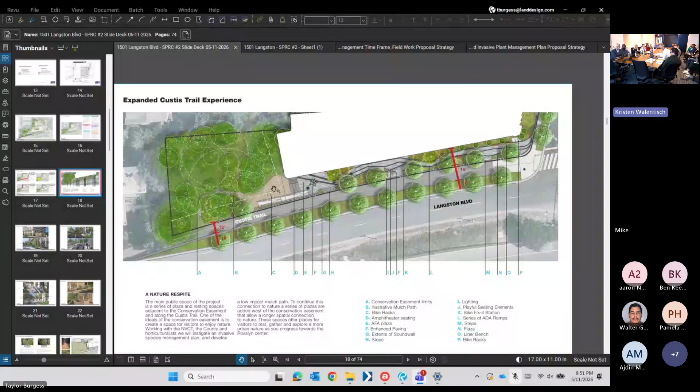Okay, there you go. Taylor, go to the one with the slope on it that shows the steep slope. That might be more helpful. So this is basically from talks with the county and Northern Virginia Conservation Trust. This is extremely steep, it would have taken a lot of going back and forth, lots of steps, and it was going to be hard to accomplish without interfering with those root zones. So we thought it would be a lot easier and better for the Conservation Trust and the conservation easement to scale back our plans and look at this smaller area where we can weave a bit easier through the trees and critical root zones without impacting that area negatively.

Okay, so there was a request from the developer about adding the connection.

We had our own consultations with our hired professionals, including our insurance provider, our legal counsel, our engineers, and then we had multiple phone calls with the developer. The board of directors of the PPOA met and we voted against the proposal. I can tell you the reasons why, based on the Conservation Trust, very quickly.

Because the slope is so steep, you would need an engineered structure in order for that to be safe for people to walk down from that height down to that level. You're not allowed to put an engineered structure in a Conservation Trust area. And therefore, the engineers and the professionals, the subject matter experts from the developer, didn't feel confident that they would be able to propose a structure that would be safe for pedestrians.

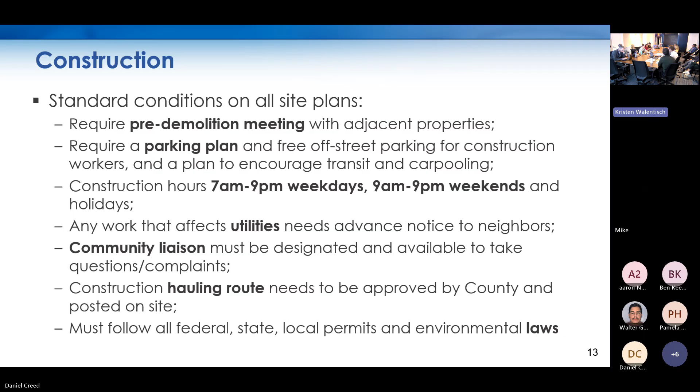So that's a big concern for me because I'm wondering if it's going to change again. I don't really like that. Was that actually the metal change that we did? Yeah, it's a lot more than that. There's a lot of material. It was shiny before and now it's not.

Another thing is, I'm hearing that maybe the sound buffer walls are not going to be removed. For projects like this, I think you should at least provide one image of what it's going to look like if that's not going to go away. Because even if it takes 2-3 years, that's going to affect the look of it, the architecture, the design. And I don't know where that's going to affect the elevation or how it's going to go. But you're showing us these beautiful renderings, and that's if everything goes well and is perfect, which I don't think it's going to be.

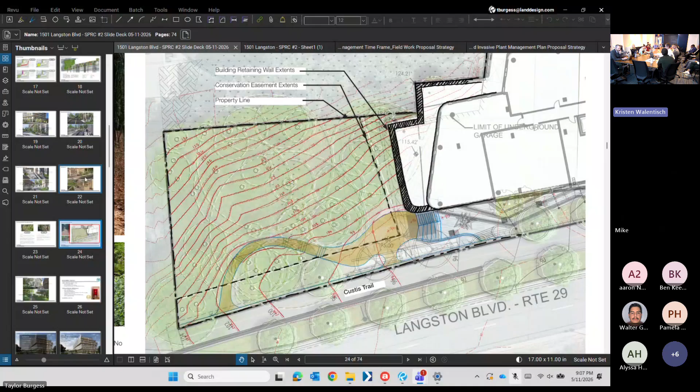With the conservation area, so I don't know, I know those are things that we discussed and I wish we would have... hold on one second. I want to make sure Taylor's following that because I didn't, but I'm not the one who designs it, so I want to make sure he got what I think we should talk about - the architecture first and what the differences are between the images from last time.

Okay, I want to acknowledge that architecture, we understand that there are always going to be changes in the process, and so architecture has to be discussed at some point in time. I think typically we do architecture during the first SPRC, but sometimes there's feedback that does impact the second SPRC. So I do want to acknowledge and respond to Commissioner Torres' comments, but I do not want to make that another topic of the evening. So I will just say this: we spent at least half an hour to 45 minutes talking about traffic that's 2D, and most people don't perceive that, right? You see the danger when it really happens, but it's 1%, 5% of the time where there's a horrible accident. Architecture is 3D. You're going to see it, you can't miss it. And we're not focusing enough on it, like at all. So I don't know, there's a disconnect. The architecture is probably the most important part because everybody actually sees that.

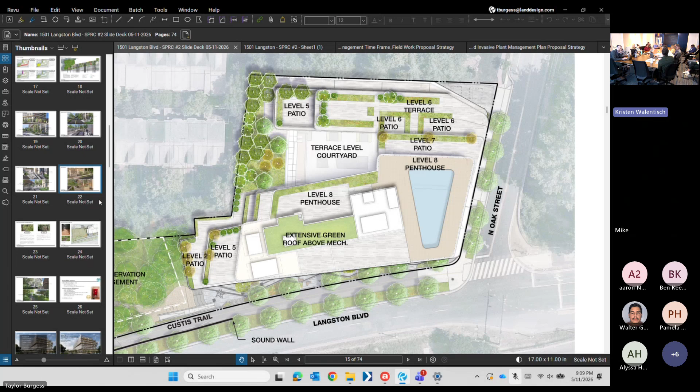Okay, I do want to give the applicant a chance to respond. I think inherently the design has remained the same. We have the movement along Langston Boulevard. The stepping has been the same because it's recommended by the Plan Langston Boulevard, and we went over the deviations last time. The base of the building has remained the same as the stone and poly material with the lighting along the activation for both North Oak and Langston Boulevard. And then the middle and top has remained glass and metal panel. The renderings now have been enhanced to correctly represent the materials that we are proposing, which was requested at the last SPRC. It's not just about materials, but okay.

I will also add that it is very common and expected procedurally for the architecture to advance throughout the SPRC and the county review process. We see this on most projects, and it almost always is an advancement in a positive nature.

Also, because of the screen, this one versus that one gives you a different coloring, so let me point out a small detail. In your previous presentation, you didn't have the fins separating the apartment units, right? That wasn't pronounced, so maybe the architecture should be resolved in this SPRC, because the fins separating the apartment units have no rhythm to them, at least from what I'm seeing. Maybe that will change, or it could actually line up with the fins on the first and second floor, which would make more sense to me.

Those kinds of details are really, really small, but to me that bothers me because it doesn't make sense. That's obviously about the demising between the balconies. So either the floor plan changed or that just wasn't added before, which is going to be visible. Got it. We'll make sure they all line up. Thank you for clarifying what you were seeing that was different that we might see.

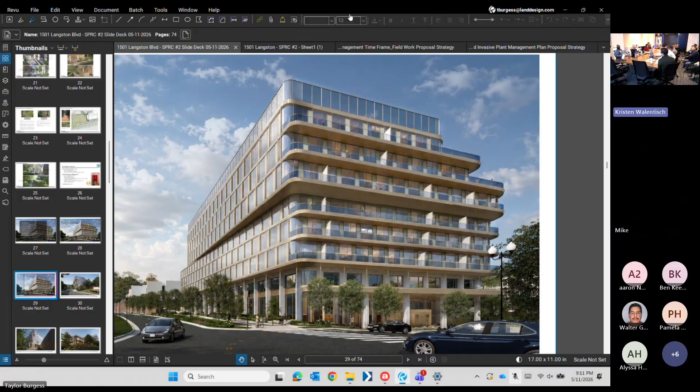Generally speaking, the agendas can fluctuate a little bit. I do think that doing architecture early, in the first SPRC, typically gives more of a chance to have that feedback, but that doesn't mean the project won't continue to change. So that may be a bigger conversation across the planning commission about the right time to have it. I think there may be some disagreement on the timing that makes the most sense and is most beneficial to the process, to the community, to the applicant, and to us as a body.